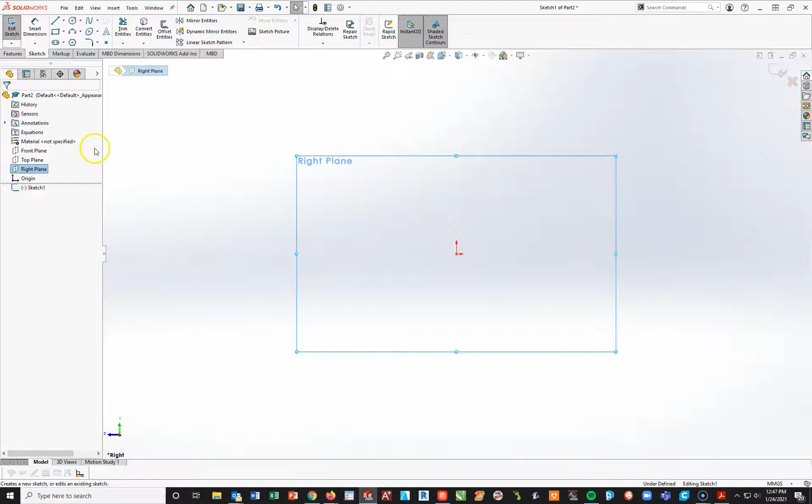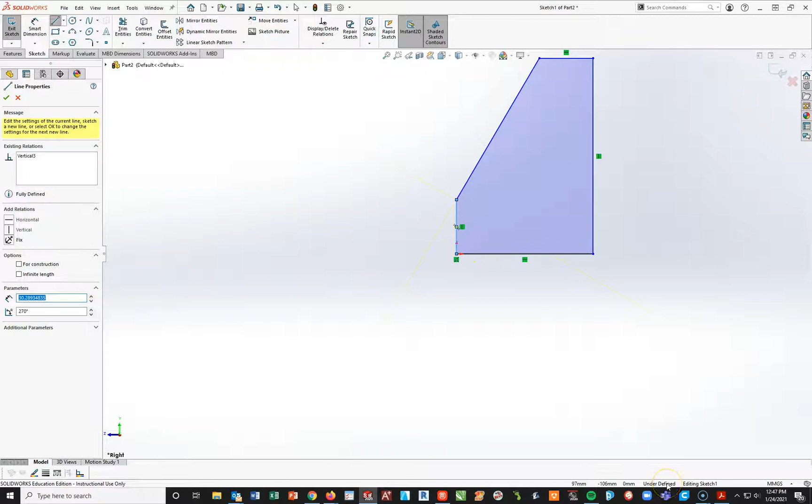I'm going to use my line tool on this one, starting at the origin, going to my right, draw a vertical line up, come back to my left, draw down at an angle till I see that line that aligns me with my origin, left click and close. Hit my F key, center everything up, and now I'm going to turn on my smart dimension and get things into place.

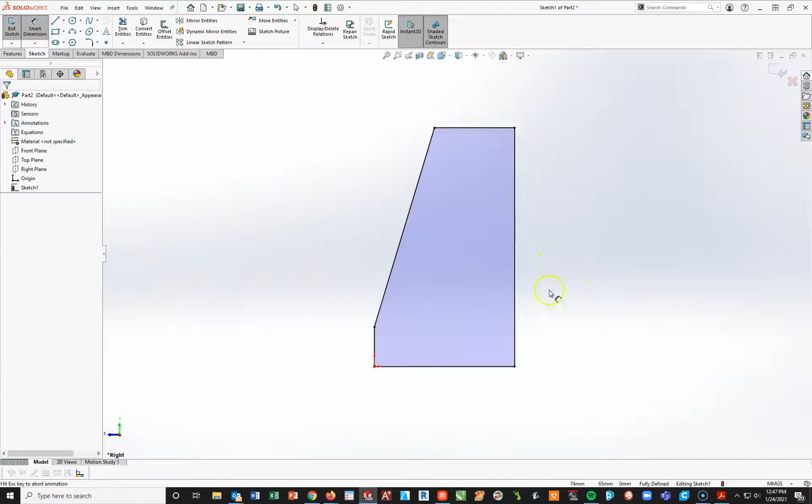I'll start with this bottom line at 70 millimeters. This left vertical line will be 20 millimeters. This back vertical line will be 120 millimeters. And this upper line up here will be 40 millimeters. Now as you can see, SOLIDWORKS is happy. It's all black. It says fully defined in the corner.

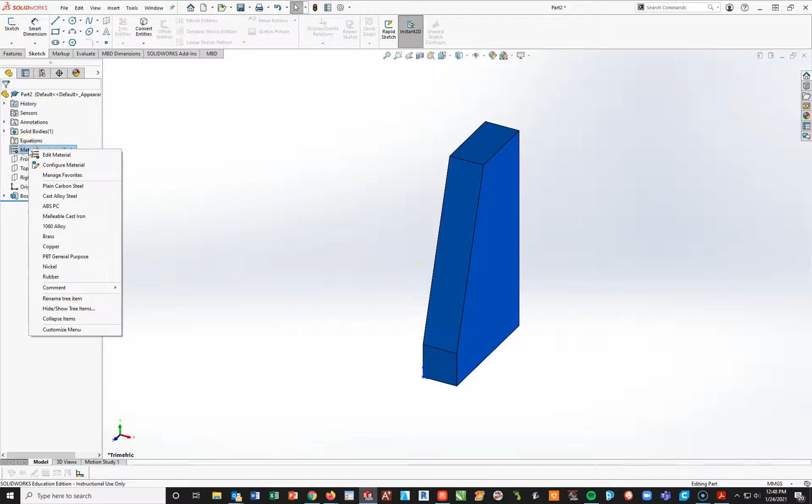So now I can go into my feature toolbar under Extrude Boss Base and make this 20 millimeters. Hit my check mark. Okay. Now I want to make this brass, I don't want it in blue. So where it says material not specified, I'm going to right click, and I'm going to use my shortcut menu right here and just pick the word brass. Alright, now I've got my first step done.

Good practice is to save. So I'm going to do a Control S for save, shortcut. And with the caps lock on, I'm going to call this ACC8B underscore my last name. And hit save.

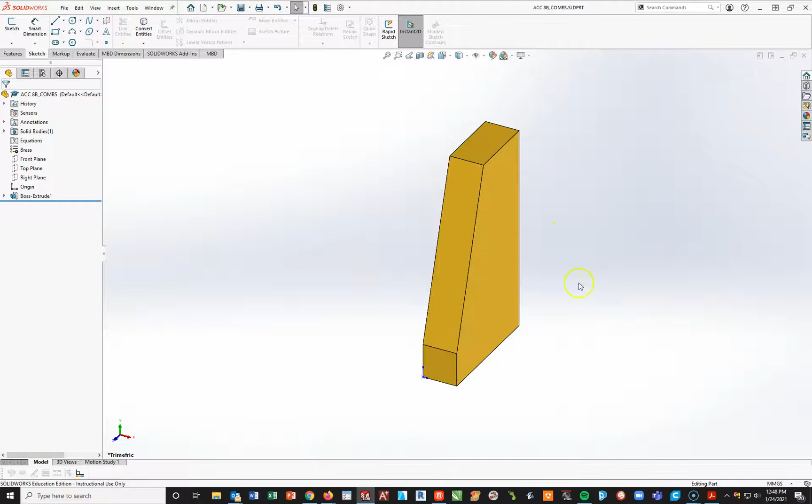So now I want to come over here, hit this face right here, and do a new sketch. I'm going to do a spacebar and a normal to. Now with my line tool, I'm going to start in this corner here and trace along the top to this corner here, come down to the bottom, pull back to my left until I see that line, and then trace up back to the top.

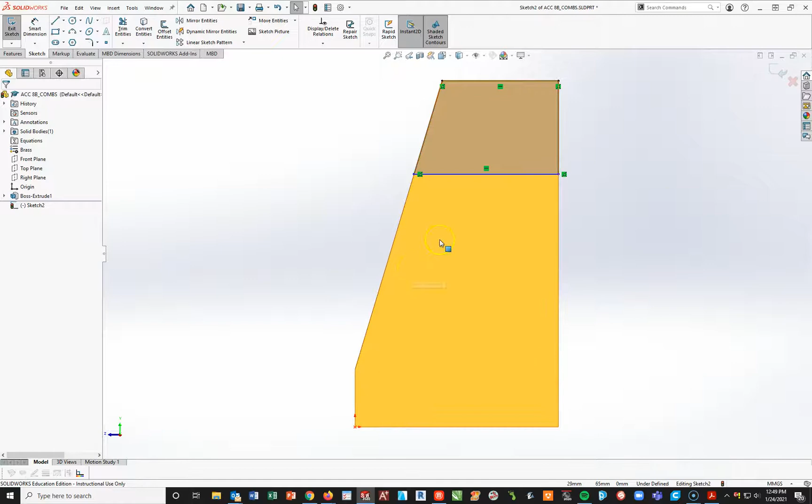Hit my escape key. I'm going to add in one dimension, which will be from this top line to here. Bring it out to the front, to the left, 34 millimeters. I see it's fully defined by all black lines and fully defined here in the bottom corner. I'm then going to go ahead from here, do a spacebar isometric so you can see this a little bit better.

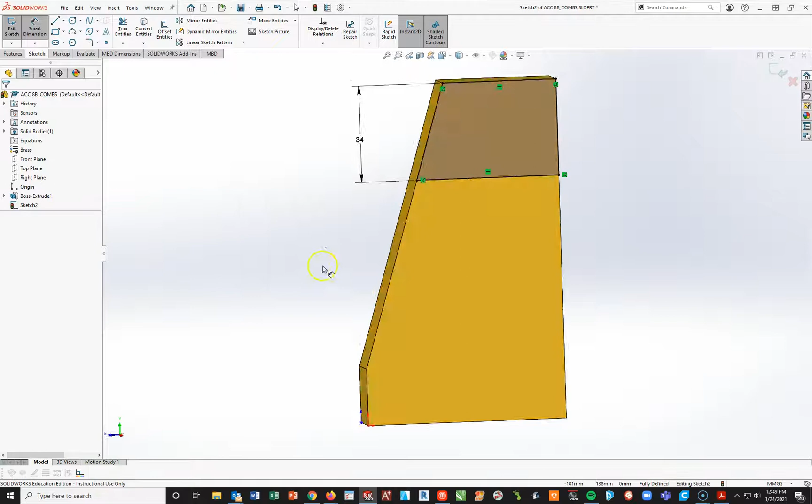I'm going to go to Features, Extruded Boss Base, and type in 14. The total is 34. We already have the 20, I'll add on the 14. Make sure your merge result is checked on. If not, you're going to see two distinct parts, as you'll see a line right there. Okay, so now they look good right there.

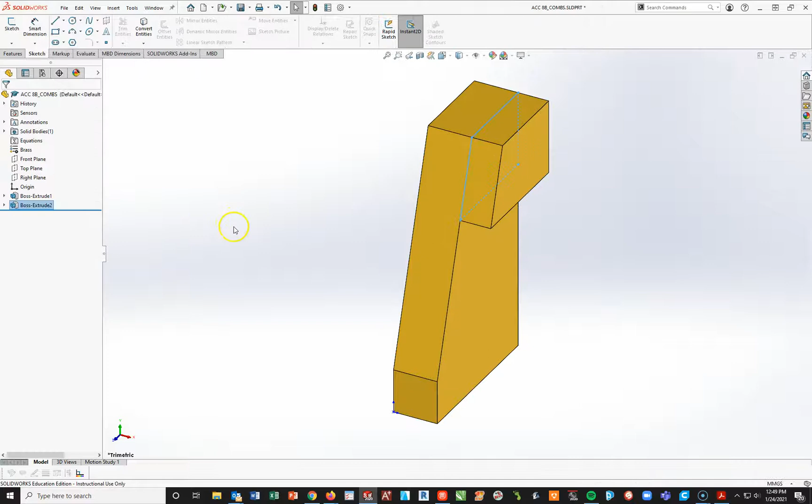I am now going to highlight this face right here, starting new sketch, spacebar, normal to. Circle tool, kind of eyeball the middle here. I'm just going to draw a small circle there and hit escape. Turn on my smart dimension tool.

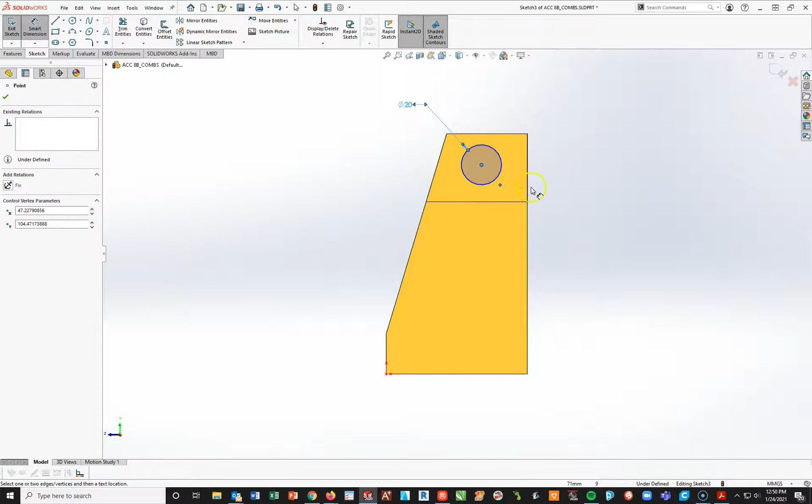I'm going to add a 20 millimeter measurement to the circle. From the center to this side here will be 20. From this center to the top edge here will be 17.

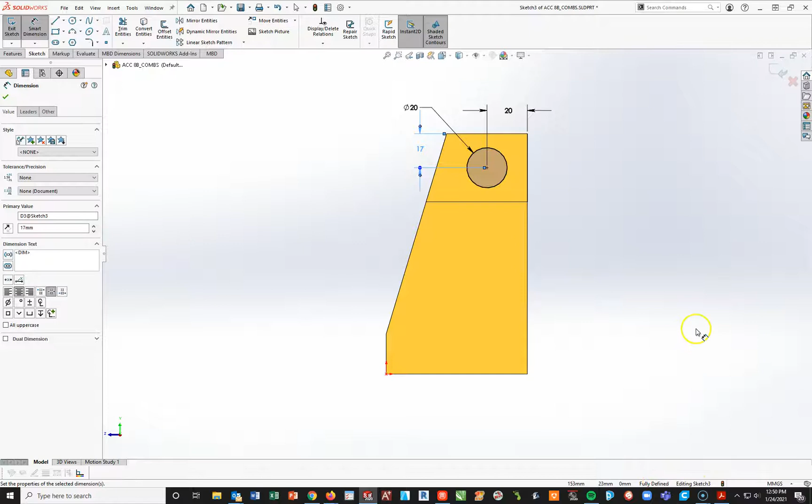Okay, so we have 20, 17, and 20. I notice the circle is black, which tells me it's fully defined, but I also know from down in the corner it says fully defined. So at this point I'm going to do isometric, spacebar, features, extruded cut, through all, and check. Now let's do a Control S to save so we don't lose this.

So the next part is we need to go add 2 countersunk holes. Countersunk holes are for screws. Screws usually have like a little V cut behind where you twist them in, so these will have kind of an angled size so they can sit flush on this surface. So this is going to be a countersink.

With that said, I'll go back into SOLIDWORKS, Features, Hole Wizard. Under my Property Manager, I'm going to look for the countersink, which should be the second box in the first row. I want to make sure my standard is matching my units - in this case it should say ANSI metric since we drew this in metric. The type of thing going in here, just leave it as flathead. Pretty much all the parts we'll do in here would be with flathead screws. Every once in a while I'll tell you it's an oval head or a socket countersunk.

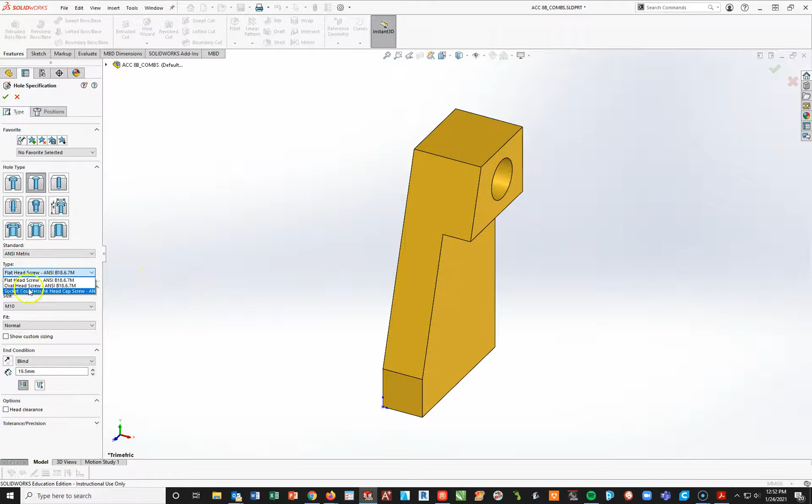We have a couple parts down the road when we get into some assemblies where we use a socket countersunk head cap screw. But right now let's leave it flat.

So going back into this, let's go into Show Custom Sizing. Lo and behold, it defaulted to M10 for some reason - if yours didn't, that's okay. But what you need to do is make sure this box is 11, this box is 20, this box is 90. Now you'll notice I suddenly have another box here. The reason this one is showing up is because my end condition says blind when it should say through all.

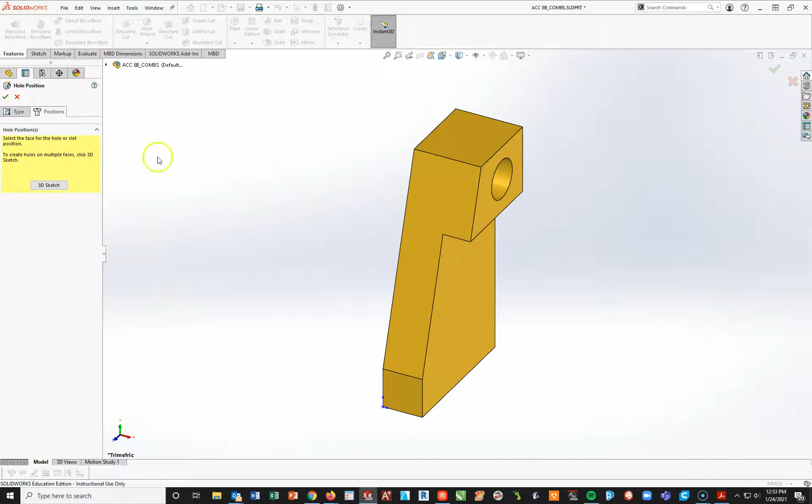Okay, so I have my sizing, 11, 20, 90, and through all, a countersink screw head. I'm going to go to my Positions tab. It tells me to select the face I want to put the holes. I click on this face over here, and again I'll do a spacebar normal to so I can see this a little bit better. I'm going to start by putting one over here to the left, and another one over here to the right, then hit Escape one time.

So going back into my SOLIDWORKS, I'm going to go here to this edge here and go 10. I'm going to go from center to center and go 34. From here to the right side will be 18. Hit Escape, then Control key, hit the 2 centers, and I'm going to go horizontal.

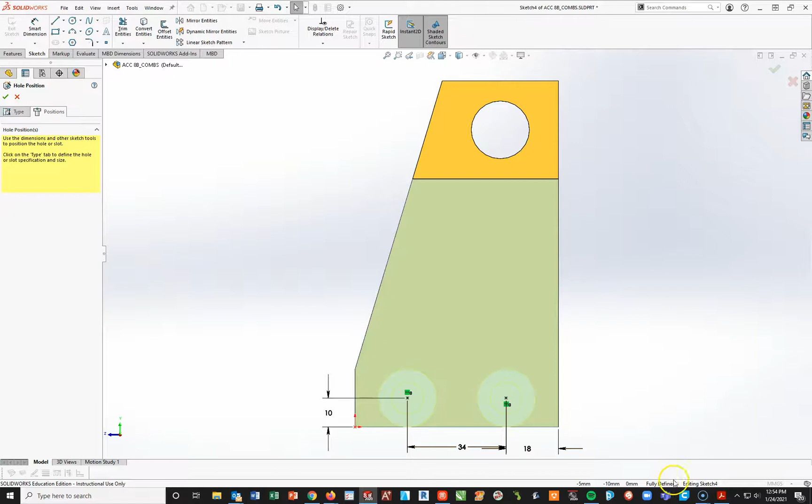Okay, now with that done, I know I'm good because it says fully defined right here. So with that said, I'll quickly do a spacebar isometric so you can see this, and then I'm just going to hit my green check mark. Now with that done, the part is finished, so I'm going to do a quick Control Save.

I now want to find what the mass of this part is, so I go to my Evaluate tab and mass properties. According to this, it says it's 1224.80 grams. If yours is different, don't hesitate to raise your hand and ask a question, or email me with a question - I can help solve where that potential mass may have gone wrong. Okay, I want you to print this, keep it, and put it at your desk.

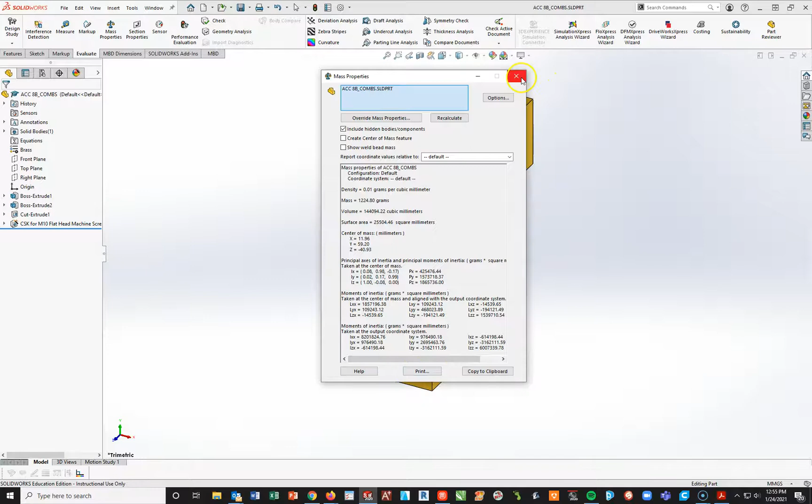And now what we're going to do is take this part here and put it into a drawing. So I'm going to go to File, New. We are again, like the other one, going to put it into a GHSB metric.

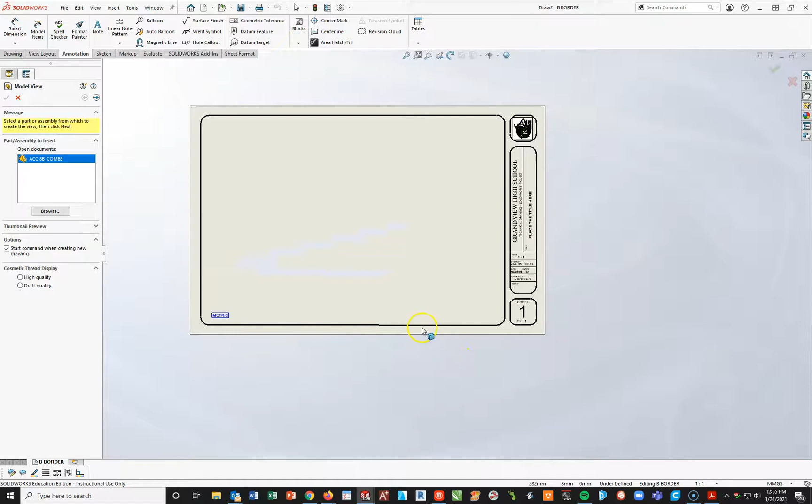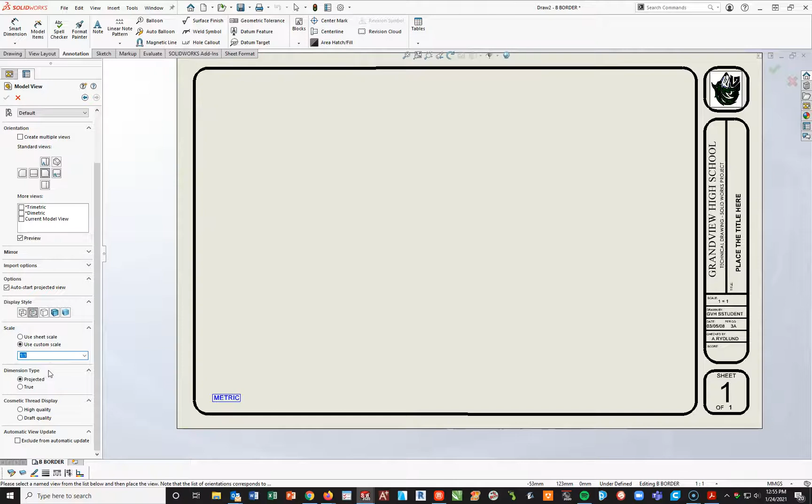Say OK. And now the same exact setup we've been doing. I'm going to double click on this one here, start with my front view. Preview is checked on. Hidden lines are turned on, but my scale should be at 1:1, and right now it's showing me at 1:2, so I will go to Use Custom Scale, drop this down, and roll my mouse ball up to 1:1. I will then come out here, and I will drop one here in the left-hand corner, one above, one off to the right.

I'm going to keep this one kind of towards the middle, and then one up here as an isometric view, and hit Escape. I will drag this down over here to this corner, maybe bring this over just a little bit more, and then I'm going to go back into this one here, click inside this box, and I'm going to turn on some color, and then I'm going to highlight these black lines and hit Delete. Okay, so there are my views.

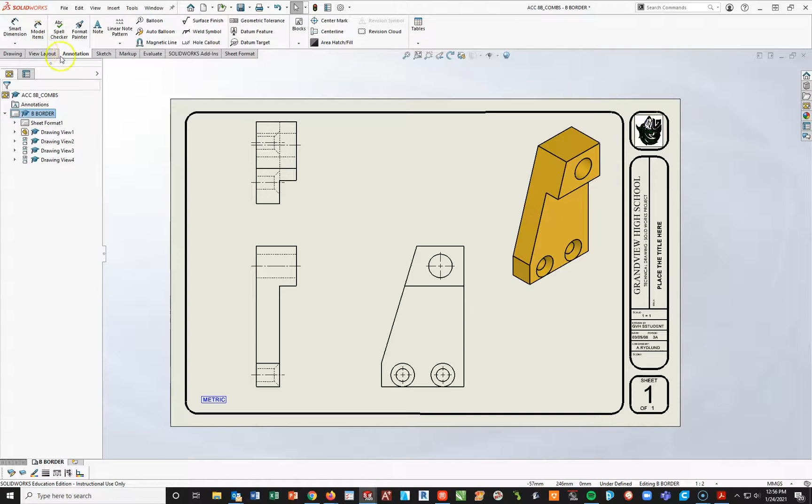Now, these are all good here. We're going to leave all these center lines on. That's good. Center marks are on. That's good. So now what I want you to do is go to your annotation toolbar. We are now going to come up here to the model items. And if you've done the previous part that we did 8A and followed this up, all this will already be set. But if you're doing this new, I'm going to drop this down to entire model. You want to make sure import items are on, and then make sure these 6 boxes are all checked on.

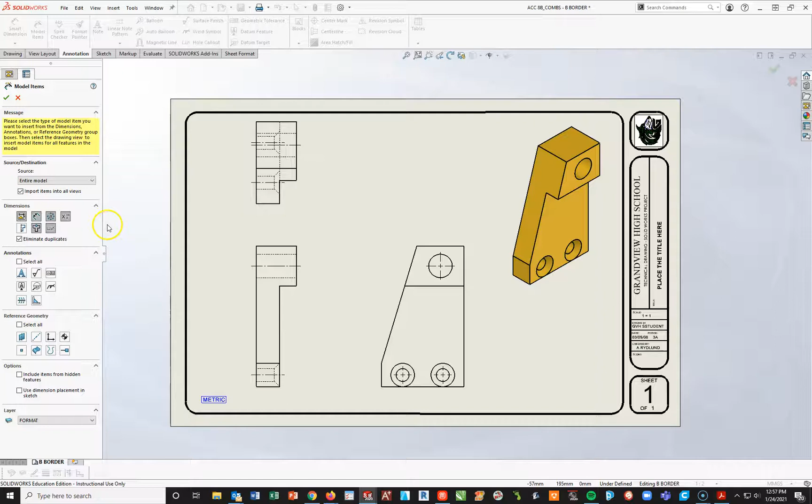Okay. Now, hit your check mark. All your dimensions drop in. Now, of course, they're not all in the right spots, so I'm going to have to do some moving. I see a couple up here that I'm going to have to actually left-click and delete. I'll take this 20 here and kind of move it out. Maybe move this 40 up a little bit more. Okay, take the 17 and keep it a little bit closer.

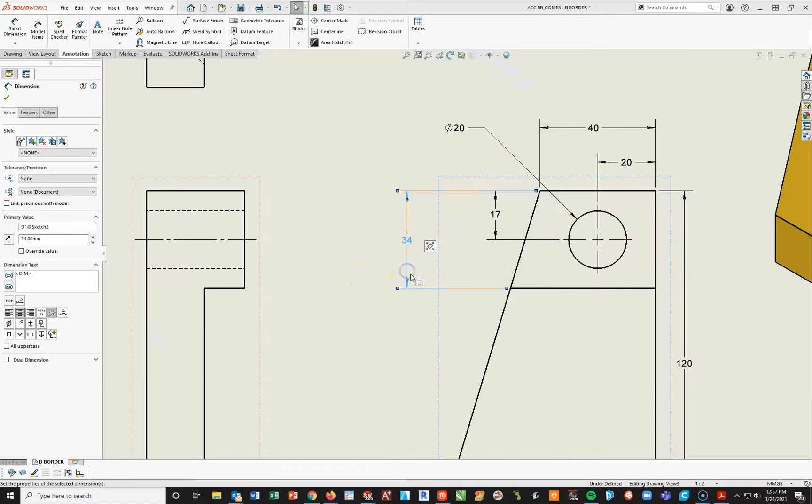Take the 34 off with a delete. The 20 and 10 look good. I'm going to take this little note here. Now again, if this is on this one, just go ahead and pull it out this way. That is fine. The 70, 34, and 18 look good, but the 120 has to go away.

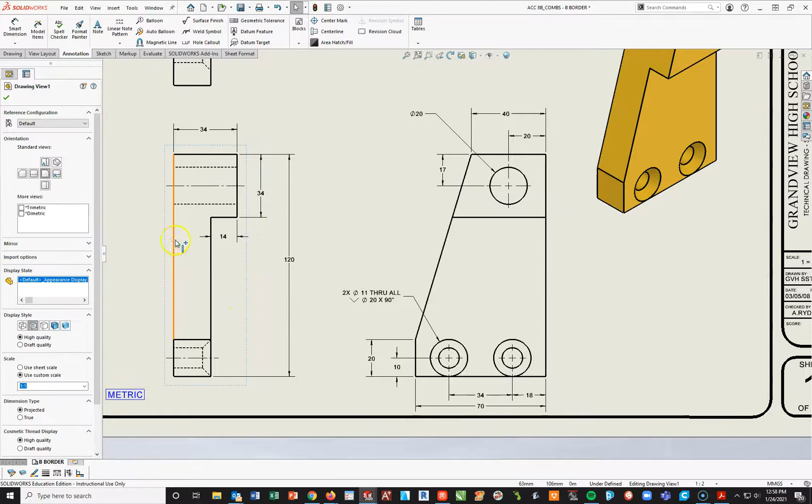Okay. I'm going to turn on my Smart Dimension tool and hit this top line here. Click on this line and pull a 14. Click on this line here for 34. And then from the very top to the very bottom, I'll make this 120. Okay, now again, you can move some things around. I can move this back to the left a little bit, move this maybe up just a tiny little bit. That looks good. I have everything I now need in place. So all my dimensions are on the drawing.

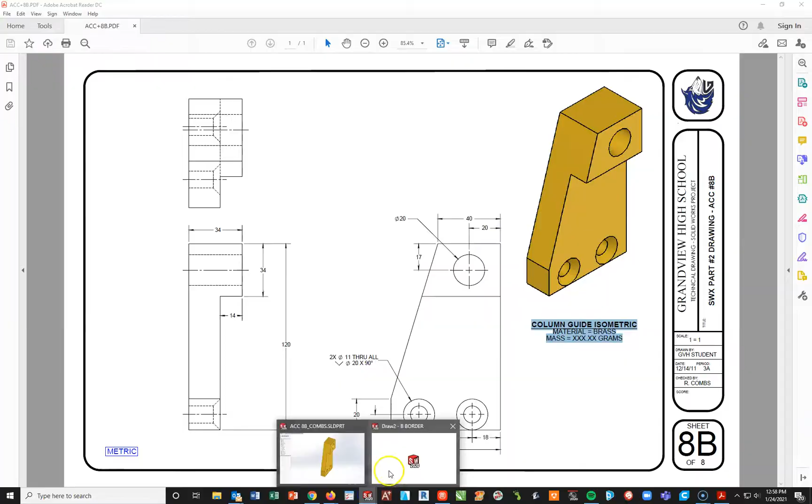I am now going to go over to my PDF file and do a left-click drag on this title right here. Do a Control C. Come back over into my SOLIDWORKS drawing again. Turn on my note tool. Drop the note underneath this part and do a Control V. Highlight with a left click and a drag. Center. Oops, escape, sorry, double click back inside there. Left click and drag the top and make sure that's underlined.

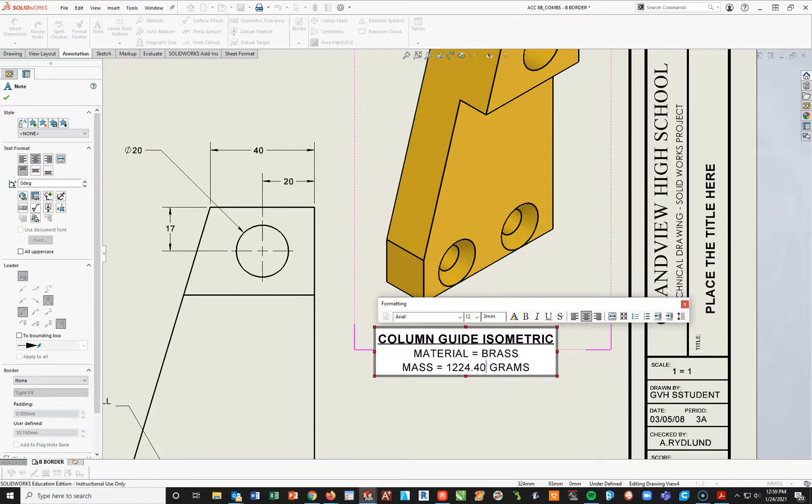Double click these X's so that you can type in, was it 1224.40? I forget. This is where you have to have that mass property sheet near you. Okay, so whatever that number is, put that in that spot. Do not forget to do that. Okay, so there is basically my completed drawing except for the title block.

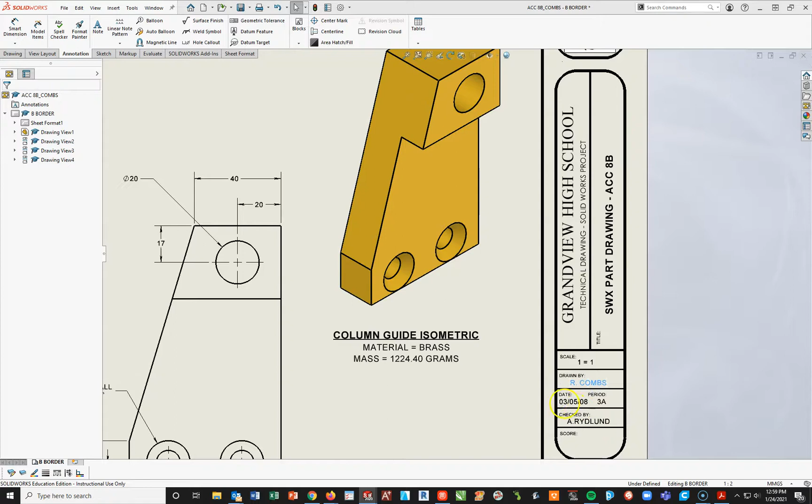So I'm going to go over here and double click place title here. We are going to call this SWX for SOLIDWORKS part drawing space ACC 8B. Scale 1:1, drawn by your first initial last name. Today's date, 01/22/21. Period, whatever class period, I'll just change this one from 3A to like 2A.

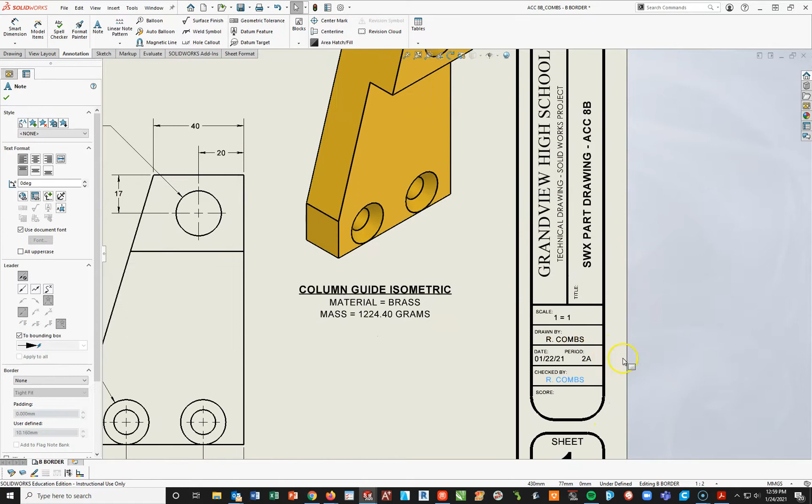Okay, and then checked by myself, R. COMBS. Okay, I'm not going to worry about the page numbers on these right now. I'm going to do those when we get actually into our assembly views. Okay, but at this point, I'm going to do a quick Control Save, Control S. Yes, update the views before you save. Save it to where you saved your part.

Hit Save. Then I want you to go ahead and file print this piece. I want you to take your mass property sheet and staple it to the upper left-hand corner here. Fold this in half and drop it into the collection box.